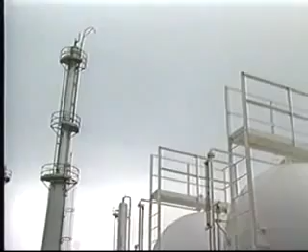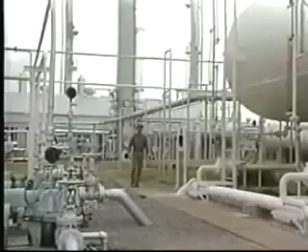This program is about pumps, specifically centrifugal pumps, and their use in oil and gas operations. When you're pumping air, oil, water, or NGLs, all pumps operate on one common principle: they move something from one place to another.

A lot of different types of pumps are used in the petroleum industry, but two kinds are seen most often: those with pistons or gears, called positive displacement pumps, and those we'll talk about today, centrifugal pumps. Another module focuses on positive displacement pumps, so we won't spend time on those right now.

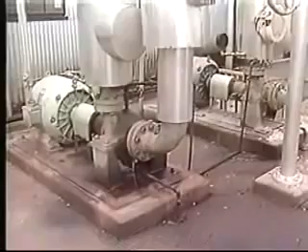So when are centrifugal pumps used? Usually when you have to move a lot of fluid, like emptying storage tanks, moving processed fluids in gas plants, providing emergency fire water, circulating cooling tower water, and many other applications.

What we're saying is that you'll see and work with centrifugal pumps just about every day. So you need to understand them, and this module will help you do just that.

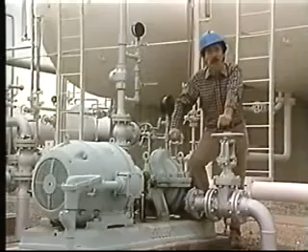This is the first section of a four-section module on centrifugal pump principles. This section introduces the various parts and operations of centrifugal pumps.

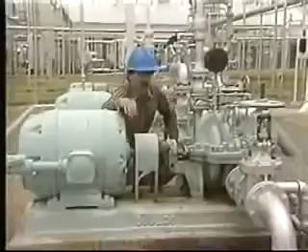Why are centrifugal pumps used so much? Because they're versatile, simple in construction, and relatively inexpensive to buy. They're also easier and less expensive to operate, maintain, and repair. But just what is a centrifugal pump? Let's start by looking at its primary components.

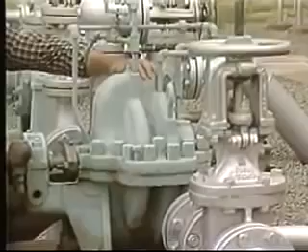When we break it down, we see that a centrifugal pump is actually quite simple, with only 6 main parts: the casing, the impeller, the shaft, the coupling, the bearings, and the seals, or packing.

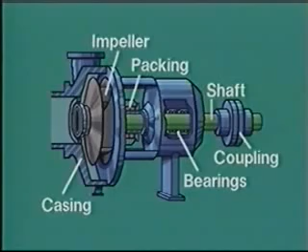Let's look first at the casing. It's the biggest and most obvious part. Its main job is to house and protect the pump parts inside. It can be made from cast iron, steel, bronze, or even special materials if that's what the job calls for.

This is the impeller. It's the part of the centrifugal pump that imparts energy to whatever fluid's being pumped. The impeller is tightly attached to the shaft and rotates at the shaft speed. Impellers can be made from different materials, most commonly cast iron. When corrosive fluids are being pumped, impellers are most often made of stainless steel, plastic, or some special material.

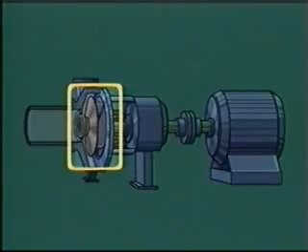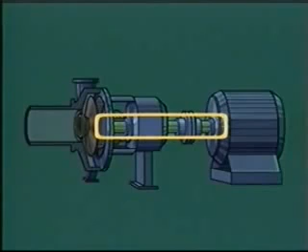This is the shaft. It's connected to a driver, which might be an electric motor, an engine, or a steam turbine. The shaft turns the impeller. Steel is the most common material for shafts.

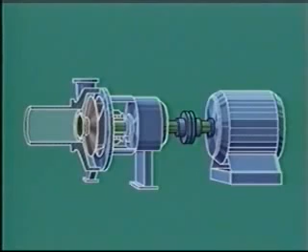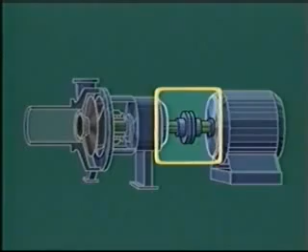Let's stop. Here's the driver. There's the pump itself. What links them? This, the coupling. It connects or couples the driver to the pump, to transmit power from the drive shaft to the pump shaft. Although they might seem simple, couplings are as critical as all the other components. They've got to be strong enough to withstand sudden changes in the pump's load and also those times when the driver might stop.

Now to bearings. They support the shaft and reduce friction as it rotates in the casing. They do even more: they control the forward and backward movement, the thrust of the shaft, as well as the shaft's side-to-side or radial movement. That keeps the shaft from rubbing against the pump casing.

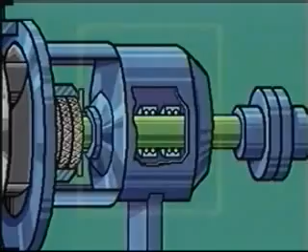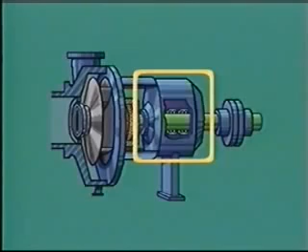Bearings can be here, in the pump casing on small process pumps, or separated in special housings on larger ones. Last are seals, or packing. They're used to stop or cut fluid leakage around the shaft.

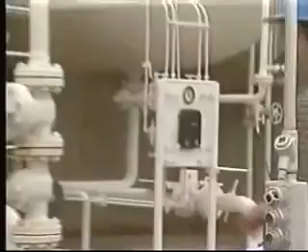That's how a centrifugal pump's built. Now let's see how it works. Centrifugal force is the key. It's that force that tends to move an object away from the center of rotation. Sound too theoretical? A common example will show that you already understand the principle.

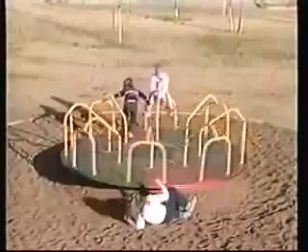The example: children riding a merry-go-round. They spin, and children move outward. And as they do, they're subjected to a lot stronger outward force that tends to force them off the ride. That outward movement is called centrifugal.

How does this relate to centrifugal pumps? In this way: when a centrifugal pump is working, the impeller rotates. Its blades stir the fluid, making that fluid rotate with the impeller itself. It's like a mini hurricane.

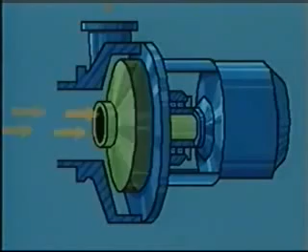The circular motion generates enough force to move the fluid away from the center of the impeller to the tips of the impeller blades. The movement of the fluid to the outside edge of the impeller creates a suction at the eye of the impeller that draws more fluid into the pump.

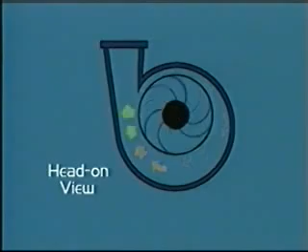If we look at the movement of an impeller, we note that the outside edge of the impeller travels faster than the inside center. So, to stay up with the impeller, the fluid has to move faster as it moves outward. That increases the energy of the fluid.

The fluid leaves the outside edge of the impeller. As it does, what happens? It enters a specially designed area of the casing known as the volute. The volute is wider at the discharge nozzle than where the fluid leaves the impeller.

There's more space, which causes the fluid to slow down. Its velocity decreases. The fluid gives up some of its energy. But that's not all, energy just doesn't disappear. It's converted into pressure, and that pressure forces the fluid out of the discharge nozzle. The fluid leaves the pump at a higher pressure than when it enters.

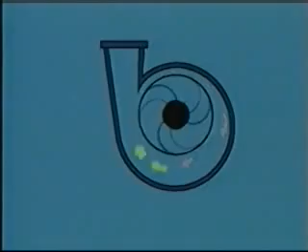So what does all this mean? Centrifugal pumps move fluids by increasing fluid pressure through centrifugal force.

This concludes section 1. Stop the tape now and refer to your student manual. There you'll find additional information and a review. View this section of tape again if you'd like, and when you feel you're ready, just start the tape again and we'll go on to section 2.